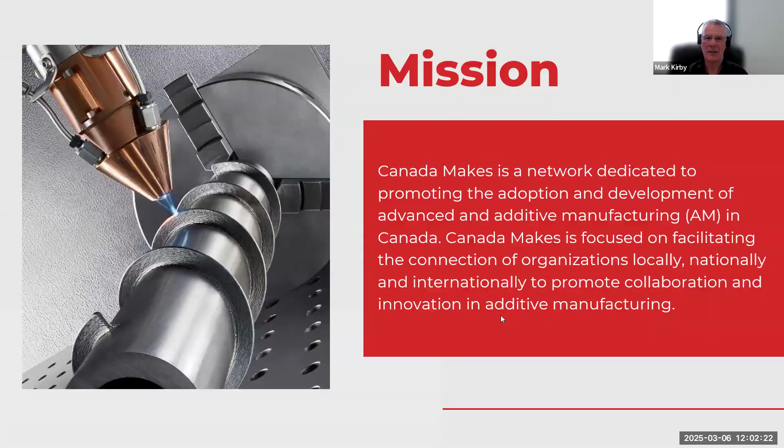I wanted to frame it this way: I think we often hear the word sustainability, and sometimes you might think, oh gosh, it's another burden, another cost, another thing I've got to do - I've got to report my CO2 footprint - as opposed to framing it as an opportunity. And boldly, I'm going to say: is green the new lean?

Is it a way that we do more with less? And again, in our changed global reality, I think for Canada to do more with what we already have is very topical. So having said that, let's see if I can advance to the next slide.

The agenda will be: we're going to have, I'm going to call her GI Elissa, Geometric Intelligence. Elissa's going to talk to us about what that is and how it can help with reducing various kinds of waste. I think this is going to be super interesting, and pretty much a world exclusive for Canada Makes - I didn't know anything about this.

Put another way, we help them reduce waste in the manufacturing process. And so that's what I want to start off with, is thinking about waste in manufacturing. There's so many ways of looking at waste. There's sort of the triple bottom line approach, and there's the 7 or 8 wastes from the Toyota heritage. I wanted to pick out these 4 critical manufacturing wastes that I think we can have a really meaningful impact on.

Material waste is, in a lot of ways, the most obvious. There's a certain amount of raw material that simply never makes its way into a final product.

But then these other wastes, energy waste, time waste, knowledge waste, whether from failed production runs due to not accurately vetting the part for the machinery, wasted time in design iteration and revisions, or knowledge waste, which I see as a huge opportunity, really, where these kind of institutional insights are lost in the catalog of previously made parts. It can be very hard to extract insights from those.

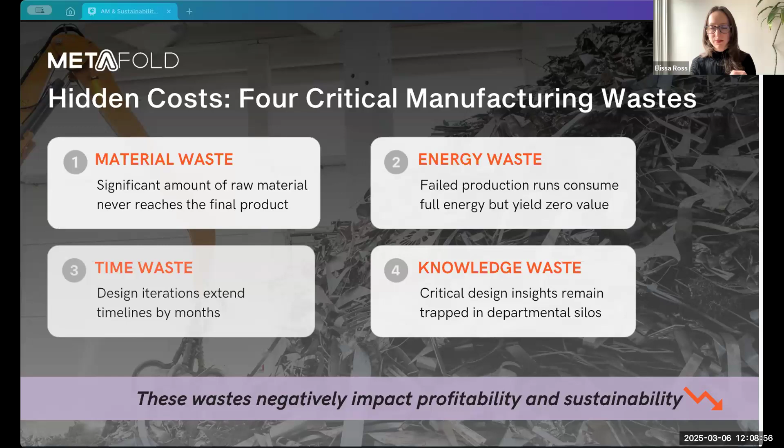All of these wastes negatively impact profitability and sustainability. Of course, at Metafold, we think there's a better way, which is this concept of very knowledge-rich manufacturing. Not a new idea, of course. This is something that every manufacturer is working toward.

But just to kind of highlight where we see ourselves fitting in, you can think of traditional manufacturing here on the left as these very disparate processes. From design, it kind of gets thrown over the fence to prototyping or validation, and then again thrown over to production. Limited communication between these different groups, and very lengthy rework cycles, redesign cycles with very limited data flow. Of course, this leads to higher waste and lower profit.

In contrast, a very knowledge-rich approach, you have an extremely robust data flow between the different stages. And I think the point I really want to highlight here is that much more is done digitally than physically, with the goal being that when you arrive at production, you're in a much more informed place.

And this is where I see a really interesting role for additive manufacturing, kind of going back to the classic application of additive as a prototyping method. I see potential still to enhance additive as a prototyping method, not just to kind of get the look and feel of something, but really to create very high fidelity prototyping with all the incredible capabilities we now have in additive manufacturing.

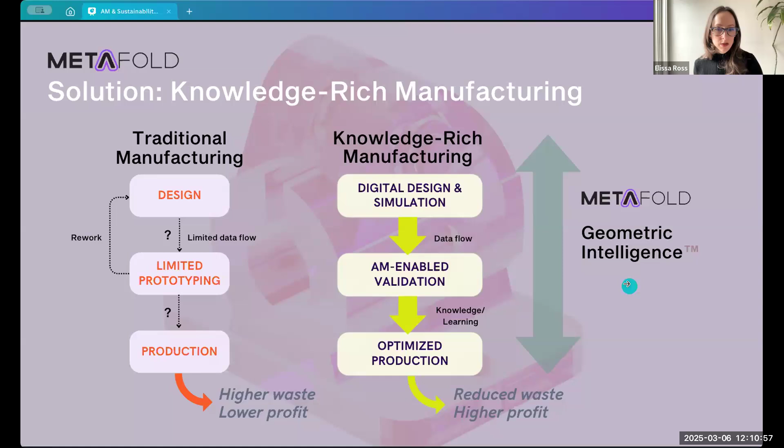So specifically, we support knowledge-rich manufacturing. I like to think of our API as a toolkit for making critical manufacturing decisions. More concretely, some of those decisions might be things like, have I made this part before?

A very simple question can be surprisingly hard to answer unless your team has been very good at naming files and keeping track of things. It can be hard to actually find the part if you know you've made it before, but where is it? And so with Metafold, we would be taking a very geometric approach to this, looking specifically for the geometry that matches, not any kind of metadata.

The second question here, is additive manufacturing a cost-effective choice? This is super interesting and not straightforward because, as I'm sure we all know, when you're making something with additive manufacturing, the name of the game is redesign for additive. It is not simply make the same part with additive.

So typically you're not just comparing the price of traditional versus additive, you're also comparing any kind of performance enhancements and improvements that you get through additive manufacturing. And then my final question here: what is the highest performing shape given a set of manufacturing constraints, whether that is CNC, sheet bending, injection molding, or additive? How do we make the highest performing shape? This is, again, a simple question, hard to answer without a lot of iteration. And this is something that we work on a lot, actually.

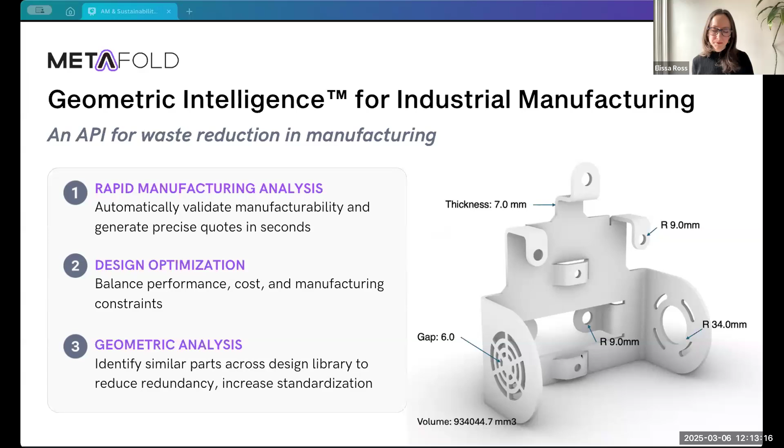And so my last slide here is a case study. I want to bring it all together here as an example project. This is effectively a dashboard that compared conventional versus additively manufactured heat exchangers. It was for a client who needs to make this decision on a repeated basis. So they are constantly assessing new specs for heat exchangers. They have a, they're really interested in using AM, and they recognize it doesn't always make sense. How do they make this critical decision? It involves a lot of factors.

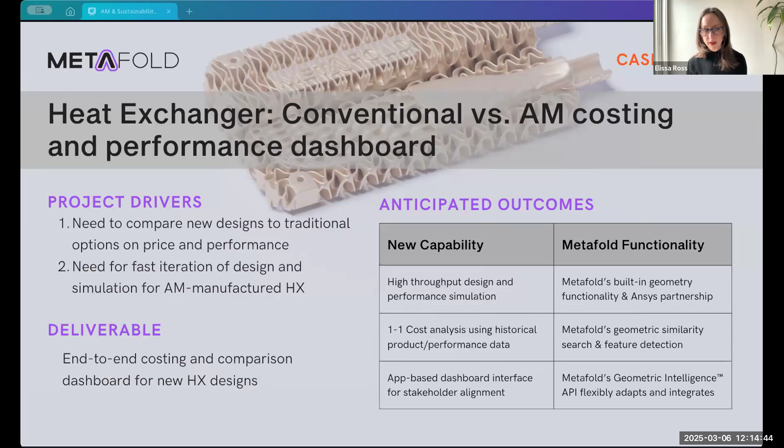Some of them are based on 3D geometry. And so this is what we tried to do: pulling all together the design, the performance simulation, and the cost as compared to what they have done in the past, what is available off the shelf, and putting it into a format that is accessible to a wide range of team members. This is important because a lot of these decisions, it's not one person, there's multiple stakeholders. How do you get them all on the same page? And so even having this interface, bringing it all together in one place, can help really sharpen the ability to make those critical decisions about whether to go with AM versus conventional, and more generally, how to make good manufacturing decisions. So that's a little bit about Metafold and our geometric API.

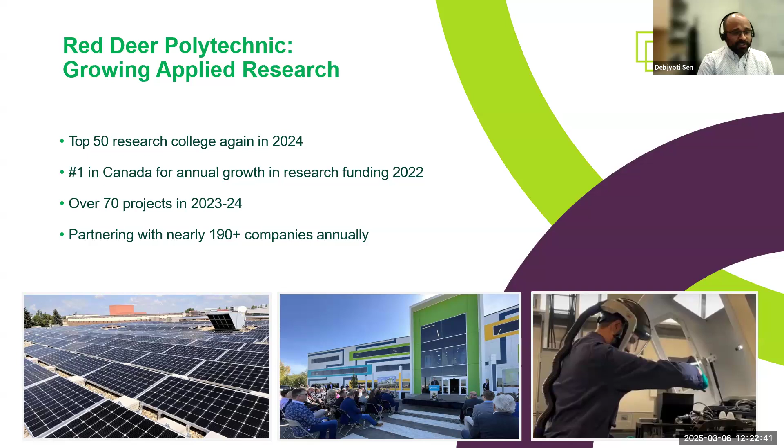So Red Deer Polytechnic's applied research is a growing applied research department, and we are number 1 in terms of annual growth in research funding in 2022. We have been consistently in the top 50 research colleges in Canada. We do around 70 projects in a year, and we partner with 190 companies. So in applied research, all the projects we do are aimed at solving an industry problem. It's very applied. Industry comes to us with their problem statement, and we try to help them solve those problems based on the resources and infrastructure that we have.

So there are 4 pillars in applied research. One is manufacturing innovation. One is energy innovation. Then we have healthcare innovation, which recently started. And then there is social innovation. There is one common framework which connects all these departments, that is data-driven innovation. As of today, we focus a lot on data because good data tells you in an unbiased way what the future looks like and what the present looks like. So that's a common platform we have among all the departments.

So I'll talk a little bit about our Centers for Innovation in Manufacturing. It started in 2009, and we are one of the leaders when it comes to 3D printing and additive manufacturing. We hosted Alberta's first commercial 3D printer in our center. We have completed so far around 400 industrial projects, and we engage with hundreds of industry on an annual basis to understand their needs - what problems they are trying to solve, how the future looks for those industries - and then we use our infrastructure and resources to solve those problems. Most of the industries we work with are small and medium size who want to develop or optimize a product. They come to us, use our infrastructure and resources, and we walk them through and bring their ideas to life.

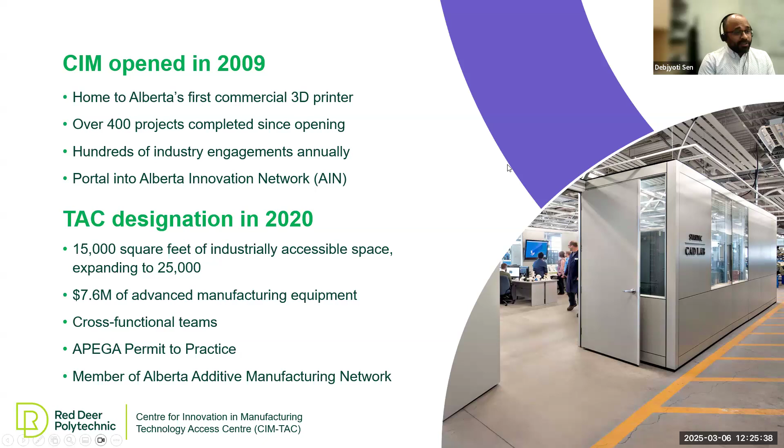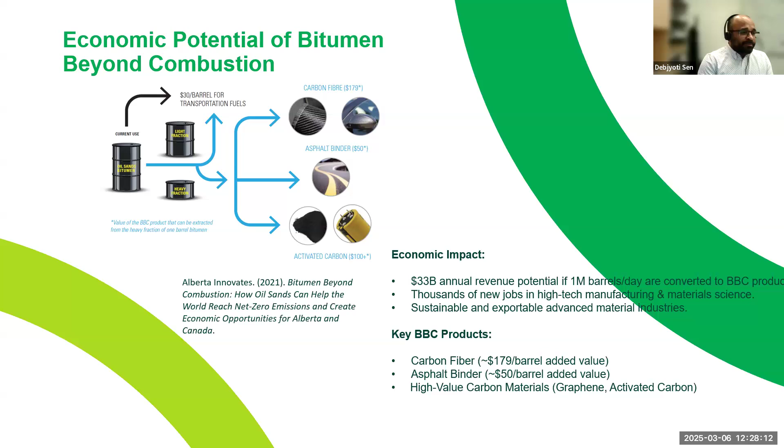The next slide will talk about some of the processes we can use, and some of the gaps in the process. The feasibility of the overall process and the economics looks good, but we have to bridge the technical or technological gaps to make it happen. Red Deer Polytechnic is closely working with Alberta Innovates, who have done a good study on this topic. They have a white paper, which I recommend everyone read. The link is on the previous slide.

What we are trying to do is use additive manufacturing to find out how we can make tangible products out of the heavy crude. One question that comes up is, why additive manufacturing? Because additive manufacturing has less waste, so it becomes more sustainable. And with additive manufacturing, you have more freedom to make different composites, so you can optimally mix carbon fiber and make composites which are inherently stronger, lighter, and more sustainable. That's the carbon fiber composite. Now there are other products like graphene and carbon nanotubes, which are used heavily in electronics for high performance. And then there is sustainable asphalt and infrastructure material, which can be proven to extend the life of roads and construction. I'll move to the next slide.

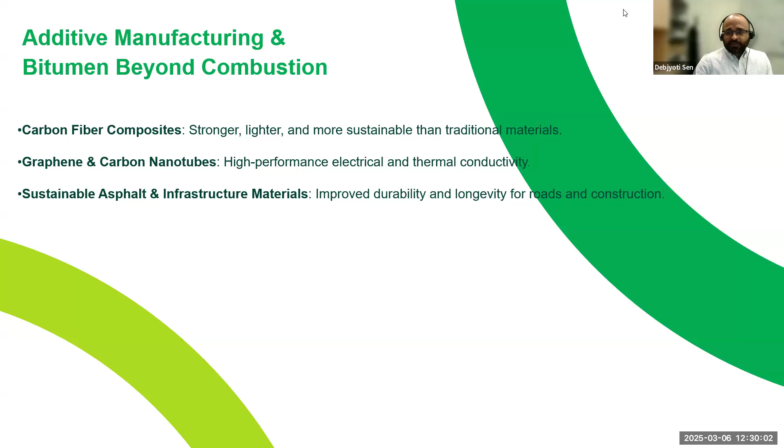So what are some of the applications of the products that can be made from bitumen beyond combustion materials? Some of the sectors are automotive and aerospace. Carbon fiber composite reduces vehicle and aircraft weight, improves fuel efficiency, and lowers emissions. An estimate shows that up to 22 to 36% of emissions can be lowered if we reduce weight using this type of material. This makes aircraft more fuel efficient, and there's a lot of space exploration going on now, so with that, every gram matters when it comes to space travel. That could be one area where these materials can be used. And then there is energy storage and electronics — with all the electrification happening in the world, that field is really exploding.

Graphene enhanced battery is responsible for fast charging and gives longer lifespan to batteries, so that's something that can be looked into. Then there is the supercapacitor from activated carbon that improves renewable energy storage and grid efficiency. There are also 3D printed conductive materials which can provide next generation electronics, for example embedded graphene in textiles and other materials which helps make flexible electronics.

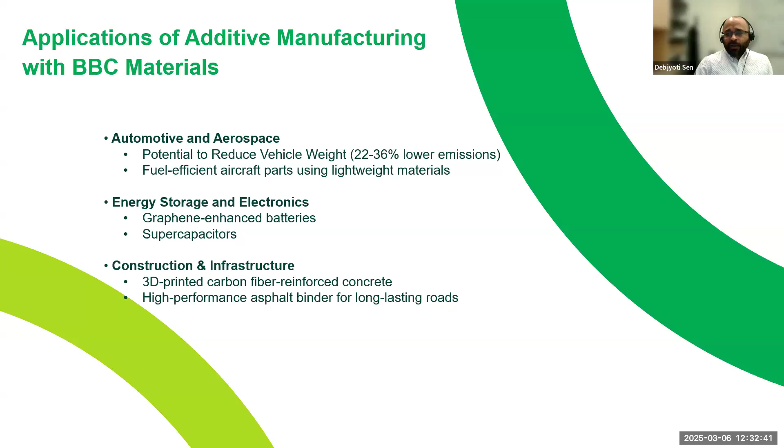Then there is construction and infrastructure, another sector. 3D printed carbon fiber reinforced concrete is one area, which is stronger and crack resistant, so buildings and bridges can be made out of that. Advanced asphalt binder gives you long lasting roads and reduced maintenance cost. Prefabricated 3D printed structures are gaining a lot of attention today, so you can have big factories where you prefab a lot of structure, which makes construction faster and helps more for sustainable construction.

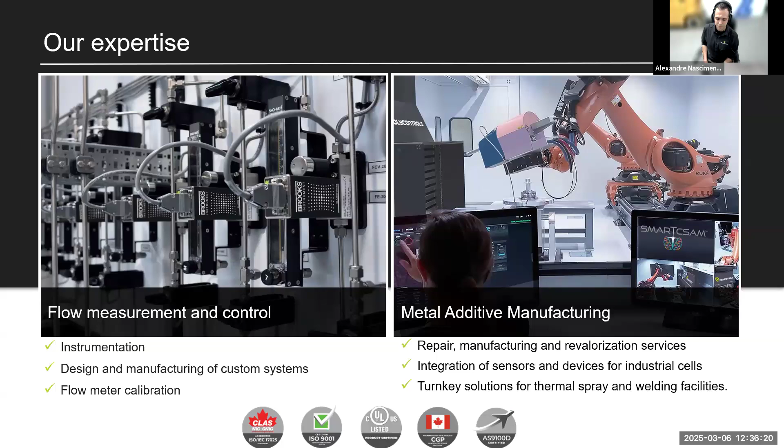I've been talking about cold spray, and I think it will be beneficial for everybody if I talk a bit about what cold spray is. Basically, we pressurize and heat an inert gas. We work only with nitrogen, so that's a good starting point - it's available as cheap gas to obtain. We pressurize that into a chamber, then the gas is passed through a specific kind of nozzle that allows this gas to achieve supersonic velocities.

Then we add particles to that gas stream, and these particles are accelerated and heated. When they impact into a substrate, that kinetic energy is transformed into thermal and plastic deformation energies that create a bonding that works like cold welding. There's no fusion involved. As fascinating as this process is, it allows you to do a lot of things, but the key advantages, in my opinion, are that there's no fusion, so there's very, very low heat input compared to more traditional additive manufacturing and other repair processes.

There's almost unlimited size restrictions, so you can work on small parts or very large parts, as long as your robot can reach and place the cold spray gun where it needs to be, you can spray there. You can work with a multitude of materials.

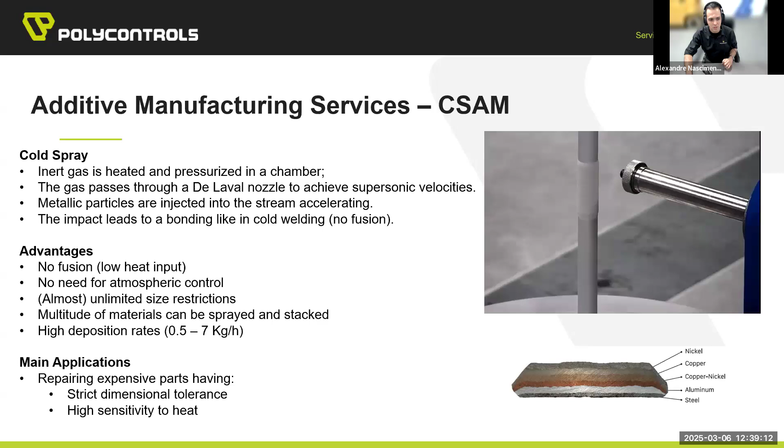So to summarize what cold spray can do for a sustainable future, I see two main things. First is life extension - repair and remanufacturing is the bread and butter of cold spray. We can reduce material consumption because we're not producing a new part. We can also apply the material exactly where it's needed without distortions, instead of placing the whole part into a furnace or a chemical bath. We can do that material application where it's needed, and extend the life of these parts by improving corrosion or wear resistance.

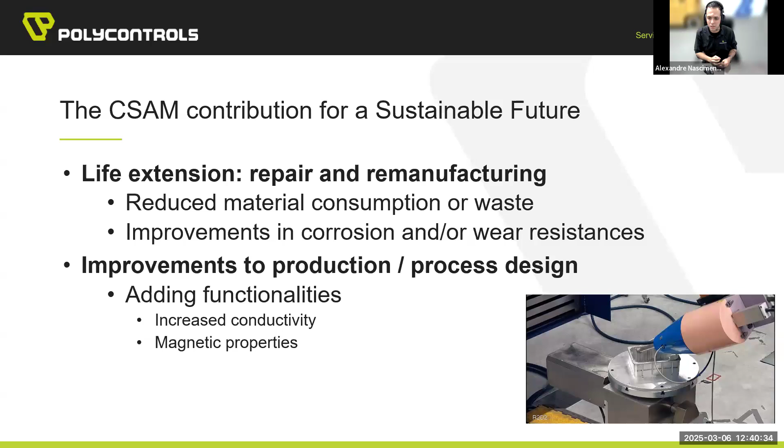Another less known application for cold spray is improvement of production and process design. We can add functionalities, and this needs to go into the minds of the designers. For example, we can increase conductivity of certain elements by adding copper or other high conductivity materials, or we can even put permanent magnets into a part. So in the context of electrification, this is an interesting approach - cold spray can deliver some interesting results. That summarizes what I had to talk about cold spray, and I'm happy to take questions if there are any.

Well, first of all, thanks everybody for giving us a little window into what's going on in Canada in these different areas. Super interesting, I think. I have asked the audience if they have any questions. Nobody's put anything in the chat at this stage, so I don't know - I've been the one asking all the questions. I don't know if anybody wants to ask me a question in terms of aerospace and additive. I would take you up on that - I'd love to hear more, Mark, about what's going on in aerospace with respect to additive.

Sure, thanks Elissa, good to be in the firing line. So Tronos - we're here in PEI, we're involved in a project with Airbus, with General Electric - make sure I get all the names, it's like the Oscars ceremony here, isn't it - CRIAQ, Alexandre, CMQ, University of Laval, Polytechnique Montreal. Looking at reusing titanium in particular for aircraft, it's obviously a widely used material.